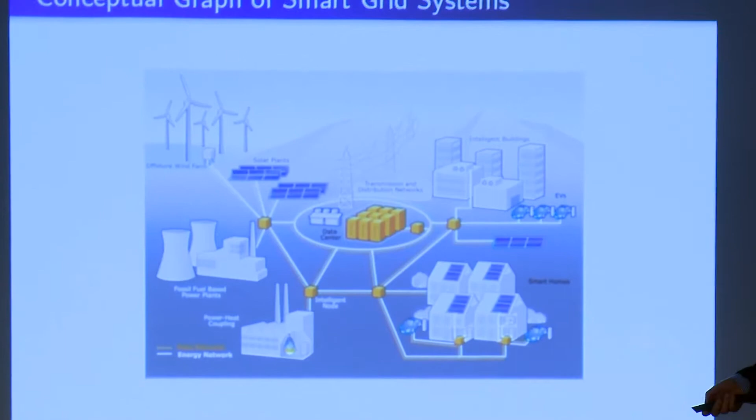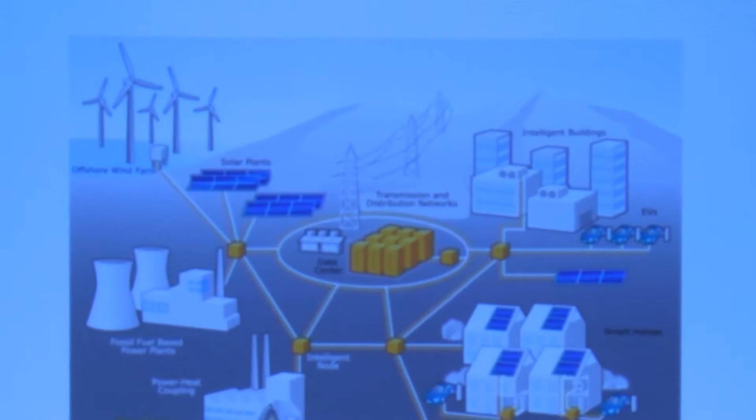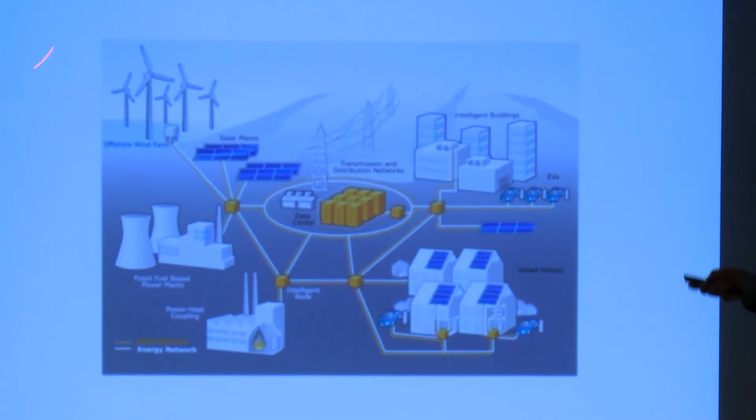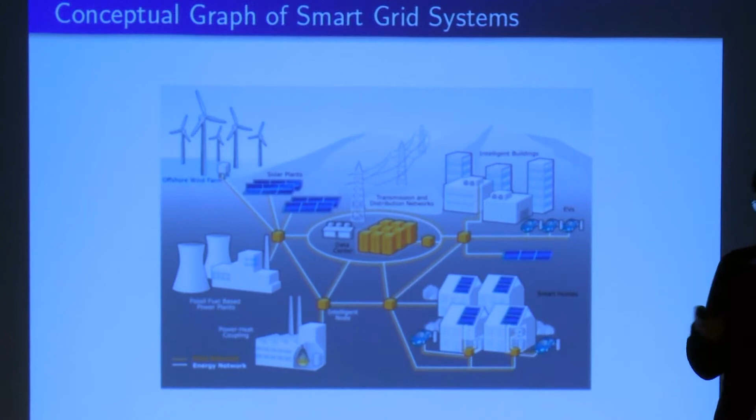Today's topic is different from other talks. Today I will present more focus on the methodology part. The methodology can be applied to guide the scheduling decision for the smart grid system with renewable energy, including currently we consider wind power, and the methodology can also be applied to solar energy. So basically, with more and more renewable energy getting involved in the smart power grid, how do we model the scheduling problem to hedge against different sources of uncertainty? That is the focus of this talk.

So that means directly we go to the mathematical modeling part. We consider the smart power grid with high renewable energy penetration. Here xi is the random renewable energy. This is the renewable energy, the wind energy.

Eventually, for the two stages, we consider the stochastic unit commitment problem, which is what we want to solve. Then we consider the constraint from balance of demand and supply, and also the constraint related to the transmission line capacity. We just consider the general form.

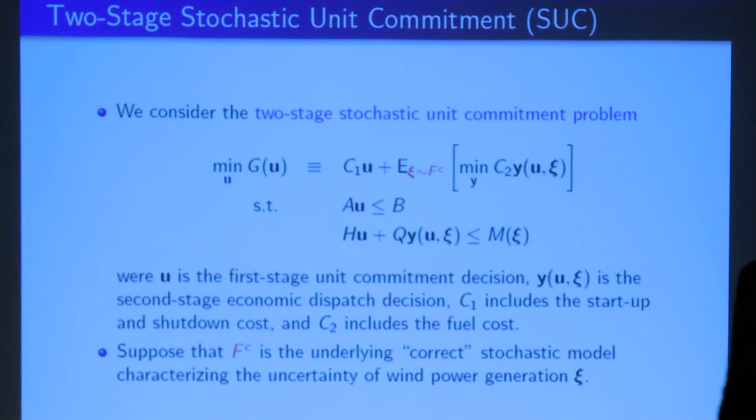The basic idea is for these two stages, the stochastic unit commitment: if we indeed know this FC, the stochastic process that characterizes the uncertainty of renewable energy, then we can solve this formulation to find the optimal scheduling decision U, and also the second stage dispatch decision.

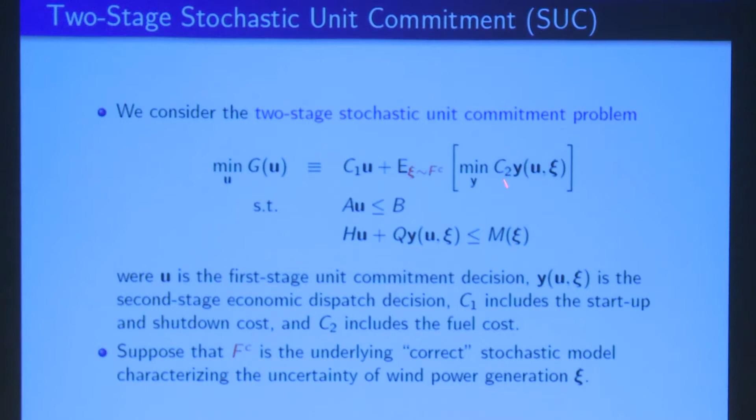The point is, when we really do the scheduling decision for the real smart power grid, we don't know the stochastic process underlying the renewable energy, the FC. That's the reason we need to estimate it with historical data of wind power generation, say the past few years of data. So when we estimate this stochastic process...

...basically this also introduces error. That means we use F hat - we don't know the exact one, but based on historical data we can estimate it, so that is F hat. In current practice, typically, since we don't know it, we estimate this stochastic process and just plug it into this two-stage stochastic unit commitment model to find the optimal unit commitment decision.

To pursue further, trying to solve this problem isn't so straightforward, because we have this expectation. For each realization of wind power, we also need to solve the second stage optimization, meaning we don't know the closed form of this expectation. This is called SAA, sample average approximation - we use a finite number of scenarios, the xi generated from F hat, to estimate this expectation.

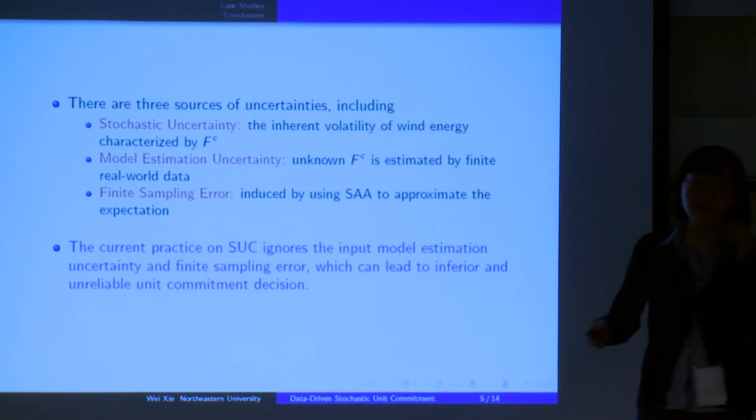So you can notice that current practice indeed considers the uncertainty of wind power, but it ignores another two sources of uncertainty. The first we call stochastic uncertainty - we cannot know exactly how much wind power can be generated next day or next week. Eventually this is a stochastic uncertainty we cannot control.

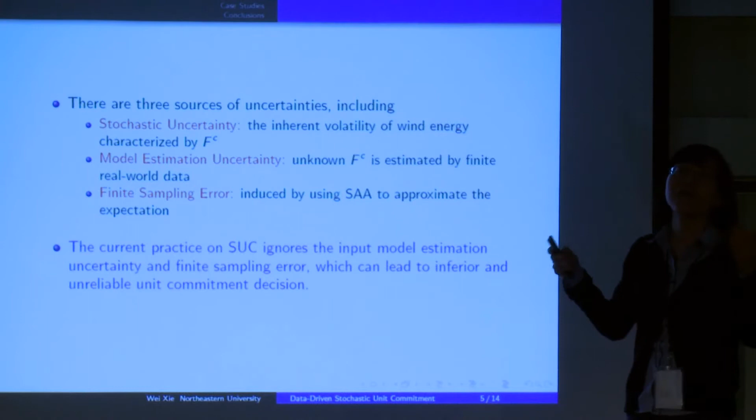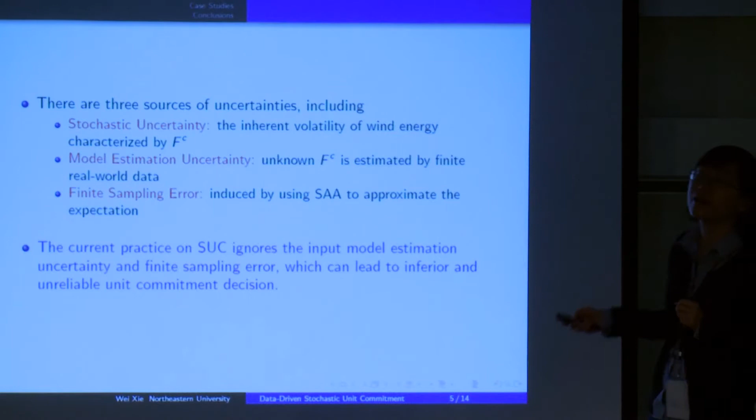So the current model indeed considers the first source of uncertainty, but it ignores another two sources of risk. Another source is what we call model risk, because this underlying stochastic process - you don't know it. You estimate it with finite data, no matter how large, but you still don't know it exactly, you estimate with data. So this causes model risk.

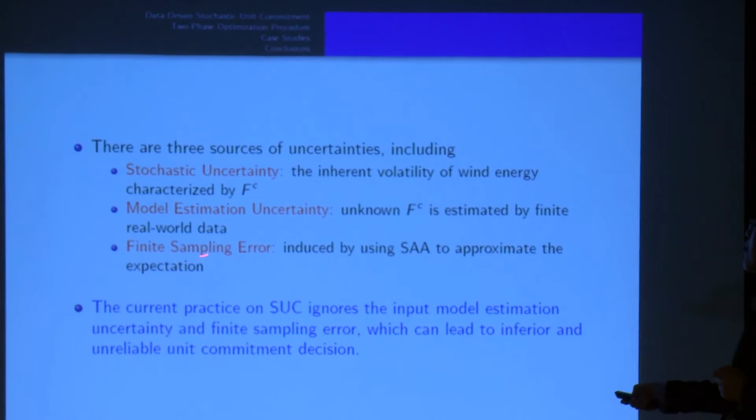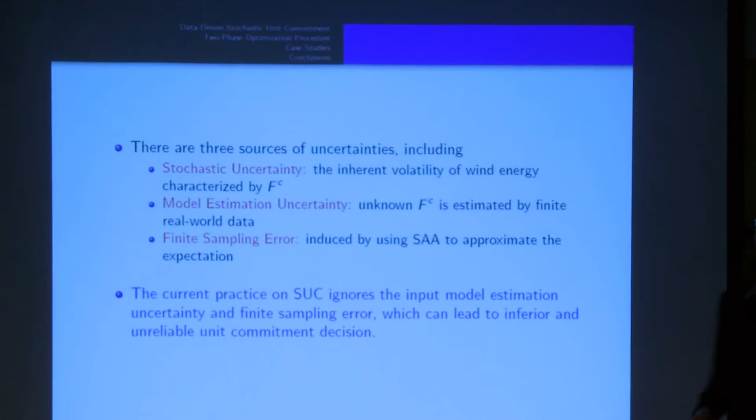The second is we use finite sampling, or the sample mean, to estimate the expectation. This introduces a finite sampling error. This typically has a large impact because as renewable energy becomes highly penetrated, the percentage of energy from wind power increases, and eventually this risk becomes larger - using finite sampling scenarios to estimate the expectation becomes an even larger issue.

So current practice ignores the model risk and ignores the finite sampling error. Because it ignores these two sources of uncertainty, we use a simple 6-bus system to easily illustrate that current practice will lead to bad and unreliable results. But definitely our approach can be applied to a general smart power grid.

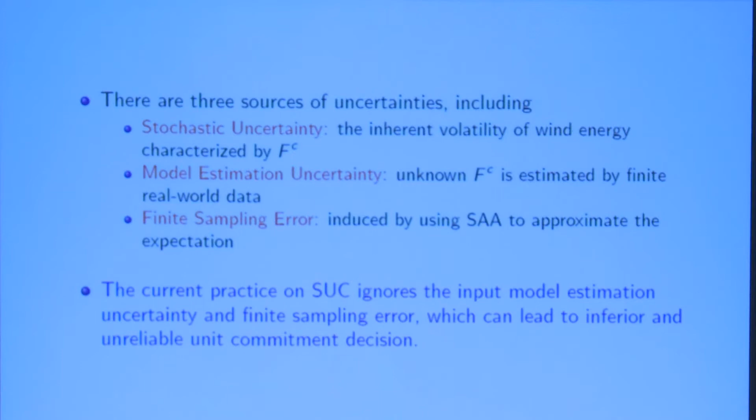Let's move to how to consider the second source. As we mentioned, the current practice indeed considers the stochastic uncertainty.

Let's first consider the model risk. So how to model it? We have a model risk because this stochastic process is really estimated from data.

The stochastic process, notation F, is estimated by finite data. We use the posterior distribution to characterize the model risk, then further use the posterior predictive distribution to characterize both: the stochastic uncertainty and the model risk. Integrated together, this generates a posterior predictive distribution that automatically considers both the stochastic process and model risk.

Then we further introduce this data-driven stochastic unit commitment. You notice it looks very similar, but the model is totally different. Before, for the expectation, you would just plug in the point estimator of the stochastic prediction model.

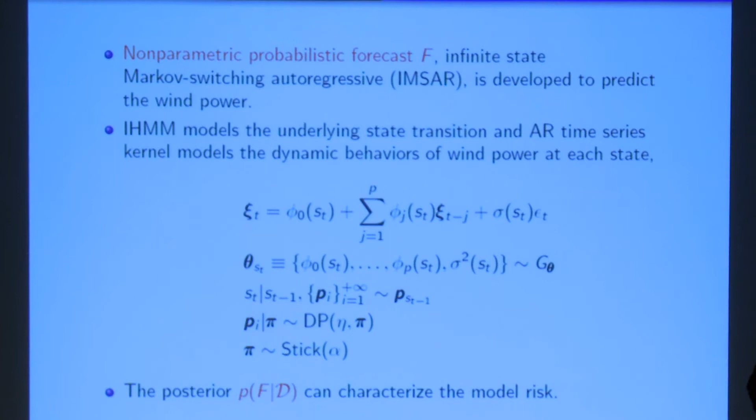The question is still how to build this prediction model, since wind power is a stochastic process with a lot of rich properties. So here we propose a non-parametric probabilistic forecast.

This is a very flexible forecast model. It can capture the rich properties in the historical data. The basic idea is as follows.

Wind power really depends on a certain state of the weather. Say today when I drove from my office to here, it was very windy, so the weather is in a certain state. But indeed, you don't really know how many underlying states of the weather there could be.

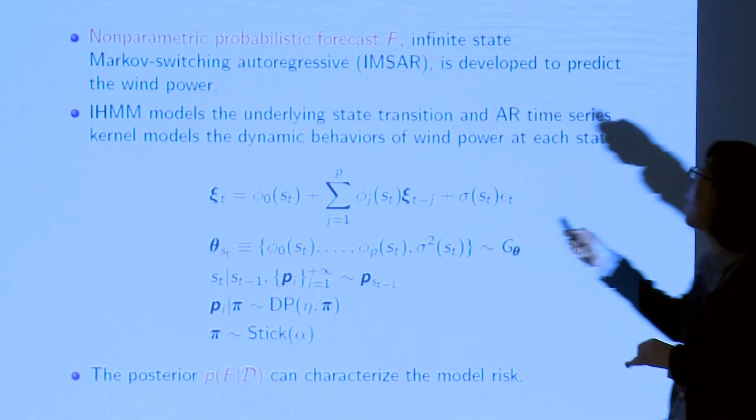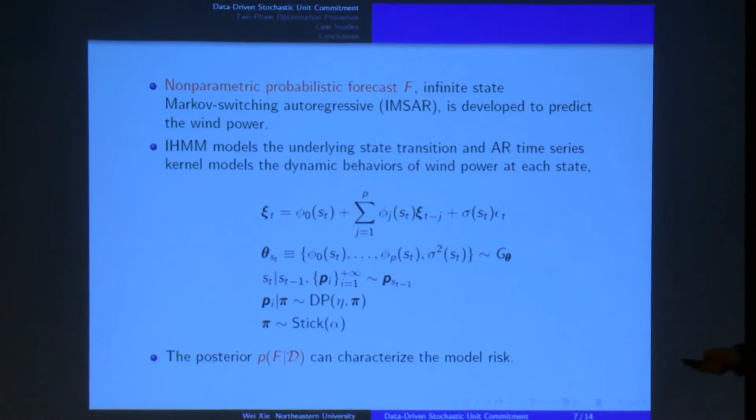So we model the underlying state dynamic behavior using an infinite state Markov switching autoregression. Eventually, how many states we've learned comes from the historical data—we can know how many potential states show up in the data. In each weather state, we further model the wind power.

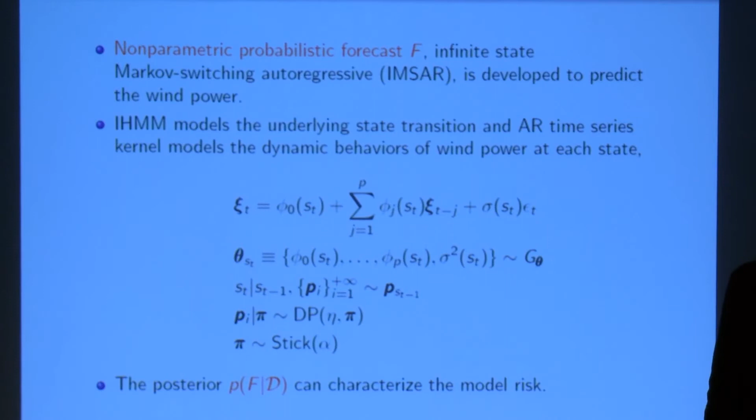This applies not only to wind power, but could also be solar power—that would be fine. We use an AR time series model, following the idea of this non-parametric approach to capture the rich properties of the underlying stochastic process.

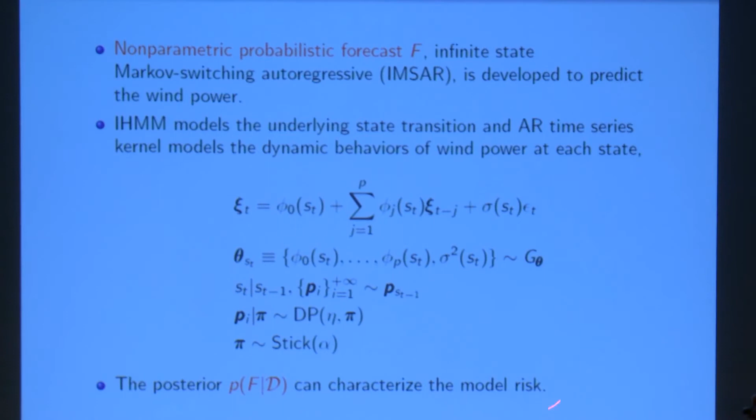The point is we still need to fit and learn this model from the data. From the data, we now have a posterior distribution that further characterizes the model risk. After that, we can learn from rich historical data, build a very flexible forecast model, derive this posterior distribution, and eventually get the posterior predictive distribution.

Then we need to solve this two-stage optimization to find the optimal policy—the unit commitment decision and scheduling decision. This automatically hedges against all the prediction risk.

But we still have a problem: we still need to solve this optimization with expectation, which means relying on SAA, sample average approximation. That means using a finite number of scenarios to estimate the expectation, which introduces finite sampling error. So we further propose an optimization and selection procedure to eliminate the impact from this finite sampling error.

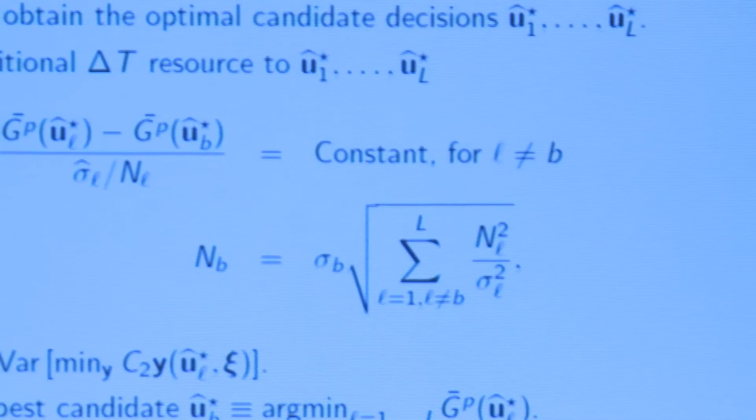So that means we will utilize parallel computing, that is parallel CPU. Each CPU core will solve this SAA approximate stochastic unit commitment problem exactly. Each computer CPU will solve this problem, and eventually for each one, they get the optimal decision, unit commitment decision. But for all the L CPUs, we get u1 hat star until u L hat star.

So the variation of all these candidate optimal decisions indicates the impact from the finite sampling approximation error. This is what we call optimization—you indeed explore parallel computing to solve the optimization problem. This candidate also provides the idea that the finite approximation does have an impact on the result.

So if they are close to each other, say the second best is closer to the first best, you will add more scenarios there to estimate the performance better and reduce this uncertainty. If it's far from the optimal one, and you're sure that it's definitely not the optimal one, you don't need to spend any effort there. So basically, this is what we call sequentially optimal selection, to select the best decision.

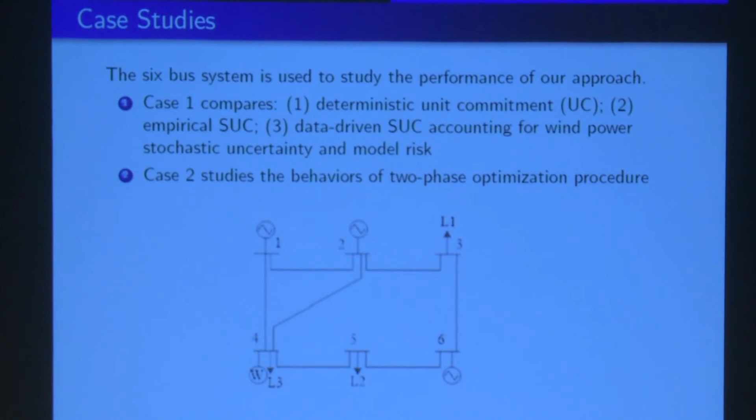Then after that, we use a very simple case to illustrate the idea. Here we use the 6-bus system to illustrate the performance of our approach. In case 1, we compare our approach with what's currently most used in the industry: the deterministic unit commitment.

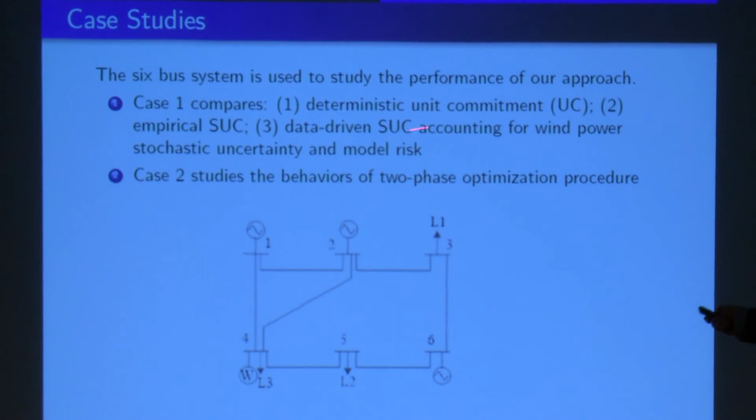How do they do that? They base it on all the historical wind power data, calculate the mean, and suppose that is the point estimator, directly plugging it into the prediction model. The second is the current empirical stochastic unit commitment: use all the historical data, estimate the stochastic process, plug it into the stochastic unit commitment, then compare with our approach, which considers all 3 sources of uncertainty.

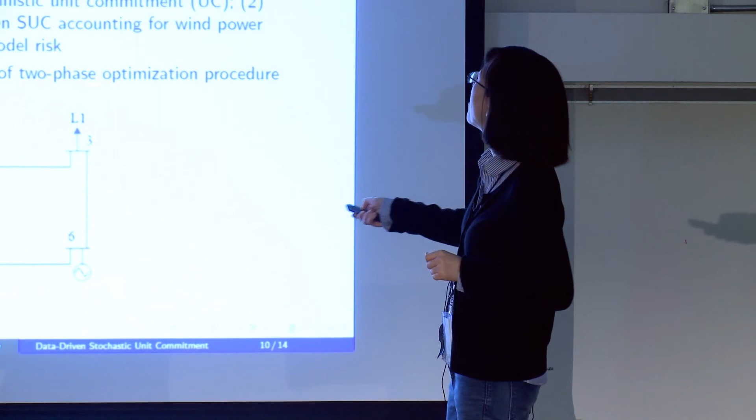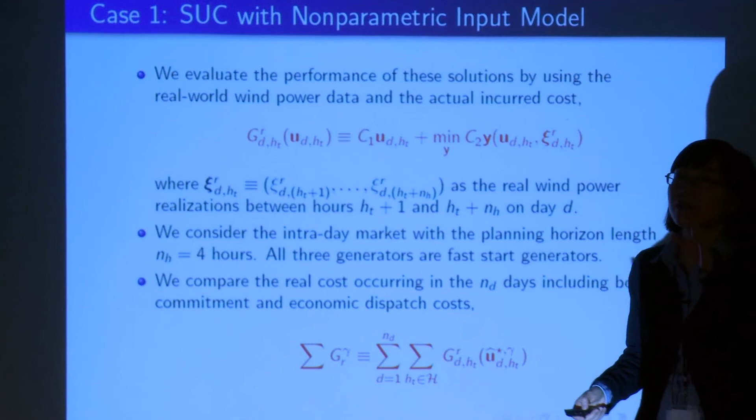Then the second case tries to see the performance of the two-phase optimization procedure. So the point is to compare which approach is best. We don't know the true underlying stochastic process of the wind power, so that means we must use real world data.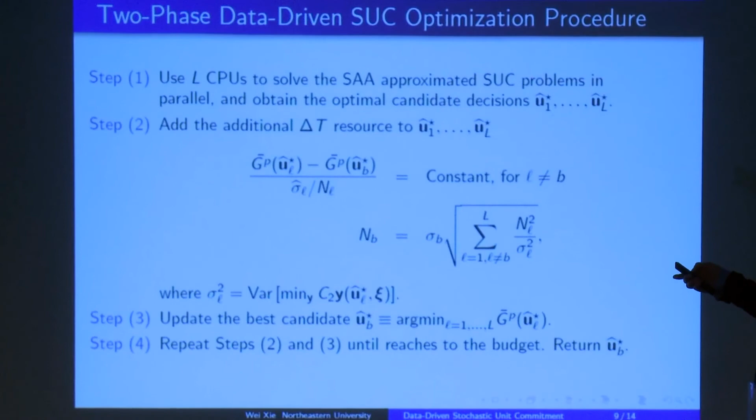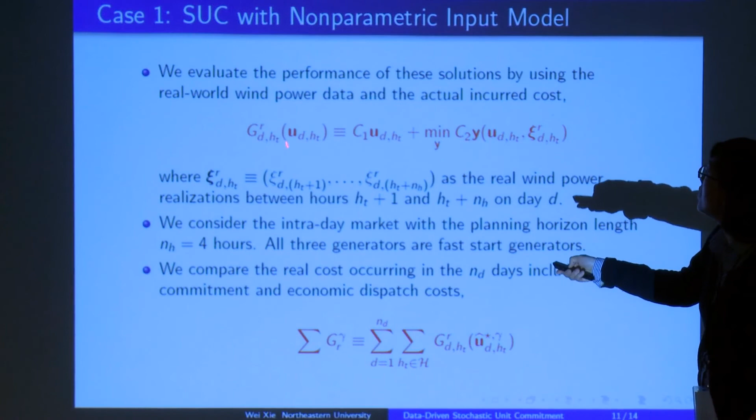Here we use xi R to indicate real world data. D indicates the day, H is related to the hours. So basically this is for U, which you get from 3 candidates—this is a model you can solve to get U. Then this is for the evaluation: for a given candidate U, you solve from a different model.

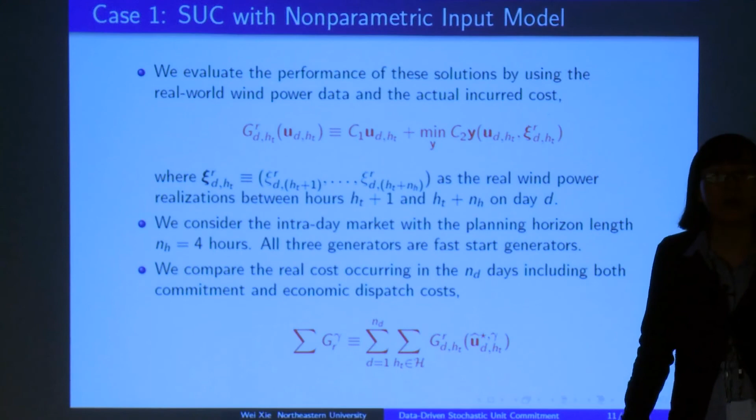Then this is the first stage cost. In the second stage, you still solve the optimization, and how you solve it still depends on the true realization of the wind power. Here, after you consider the historical data, you have ND days, each with 24 hours.

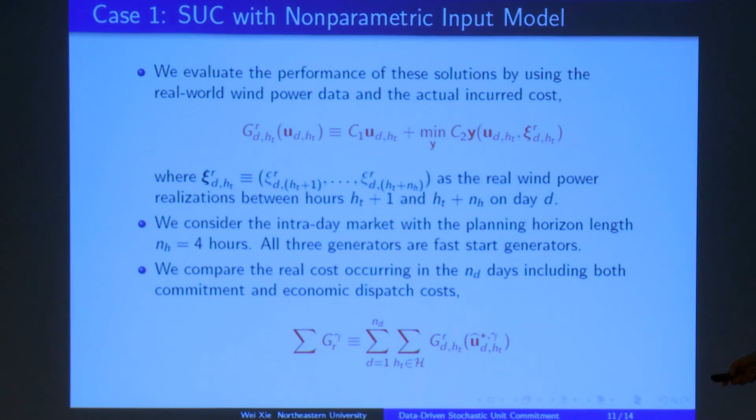Then we consider the intraday market, meaning the planning horizon here is only 4 hours. Suppose in this example all 3 generators are fast-start generators. Then let's see what the performance looks like.

So, okay, how many minutes? Negative? Oh okay, almost done. Maybe two more slides. Okay, let me try to speed up—sorry, I've caught a cold.

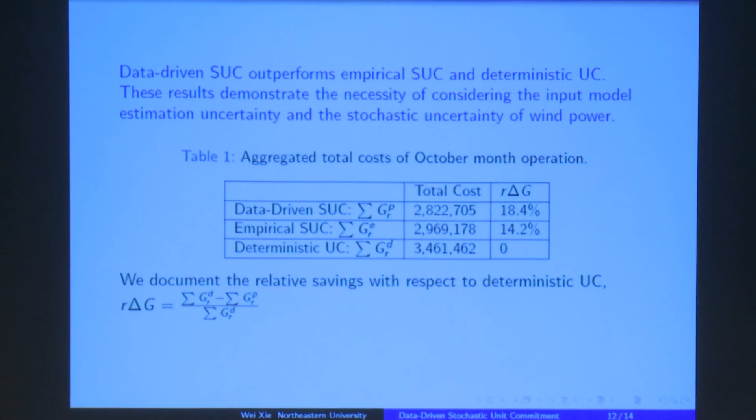Okay, so here D is the deterministic result. The deterministic approach has the worst case, so we compare the relative error against the deterministic result. Definitely, the empirical stochastic unit commitment has a cost saving, and further, because our approach also considers model risk, we see an advantage. They further consider the 2-stage optimization.

Thank you. Thank you very much.